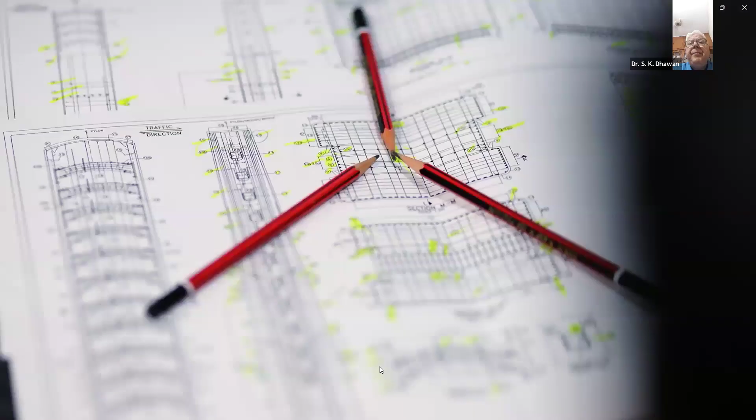IAStructE is registered under the Societies Registration Act 21 of 1860. It is a national apex body of structural engineers in India with a mission to promote the structural engineering profession and cater to the professional needs of the structural engineering fraternity.

In the short span of two decades, the association has attained an eminent position in the professional field. Its membership is valued very highly in the profession.

Since inception, IAStructE has been led by eminent structural engineers like late Shri Mahendra Raj, late Shri Shri Kumar Ghosh, late Shri Subhash Chand Mehrotra, Professor Mahesh Tandon, Shri Manoj Mittal, Professor R. Pradeep Kumar, and Shri Alok Bhowmick as its president.

IAStructE is a permanent member of the Engineering Council of India and interacts with the government on professional and policy matters related to civil and structural engineers.

To expand its reach, IAStructE has collaboration with various international professional like-minded associations and institutions like IStructE, UK and FIB for strengthening global connections and professional exchange.

IAStructE's prime objective is supporting and protecting the profession of structural engineering by upholding professional standards and acting as a mouthpiece for structural engineers in India.

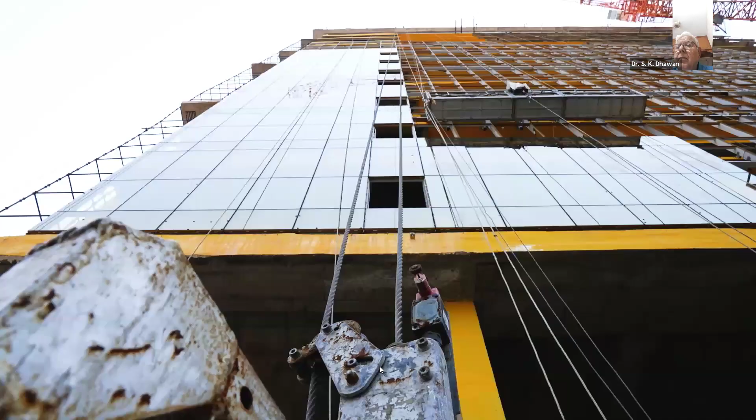IAStructE endeavors to ensure that its members develop the necessary skills in structural engineering and work to the highest standards by maintaining a commitment to professional ethics and standards.

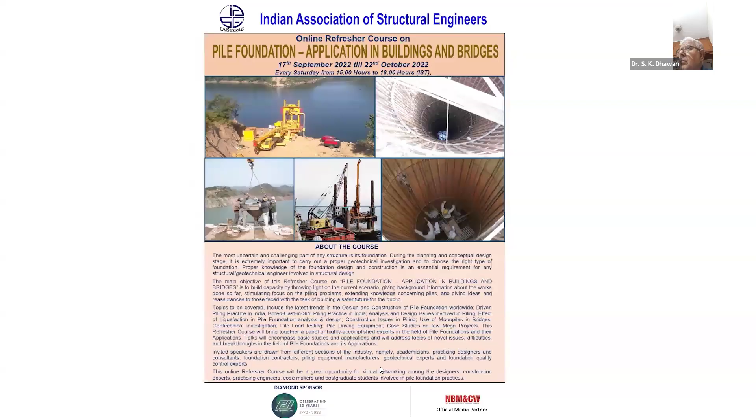IAStructE is actively engaged in organizing several continuing professional development (CPD) courses for structural engineers to help them update their knowledge and advance their career paths.

It also conducts refresher courses for young and practicing engineers and student-oriented programs. Seminars, workshops, conferences, technical lectures and discussions related to the latest technological advancements and case studies are also organized regularly for members to enable them to continuously update their knowledge and skill set by interacting with the best minds from the industry. IAStructE's activities are widely appreciated and known for quality technical content.

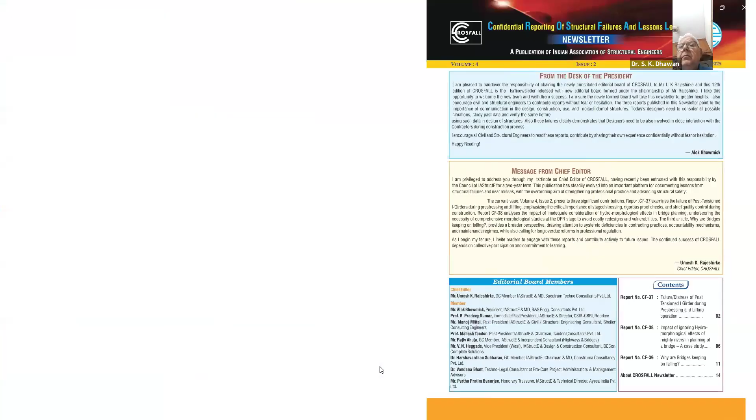IAStructE is also actively engaged in publishing its quarterly journal Structural Engineering Digest (SED), code commentaries, professional guidelines, monthly newsletter, and CROSFALL, a unique quarterly newsletter that confidentially reports structural failures and the lessons learned from them. IAStructE's publications are becoming popular with time.

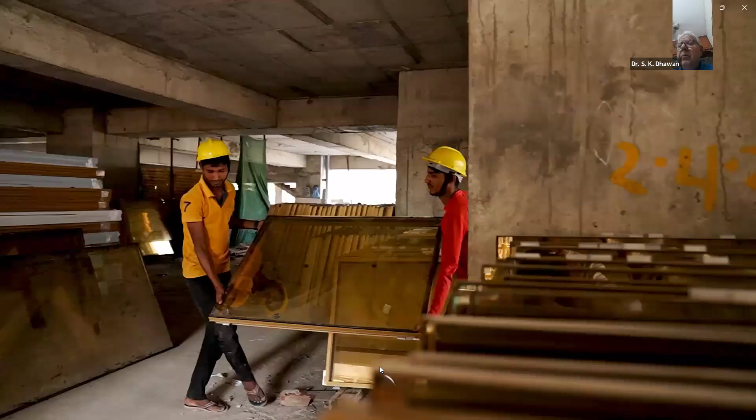IAStructE has representation in various technical committees of BIS and IRC as well. Its members are actively contributing to National Code of Formulations.

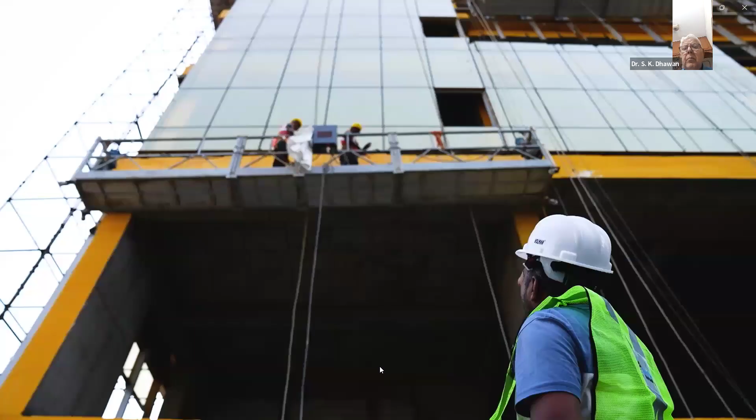In the year 2020, IAStructE started a National Awards competition to stimulate interest in the structural engineering field and to promote innovative thinking and creativity. The awards are presented to winners in recognition of their outstanding contribution to structural engineering in categories which include Outstanding Structure, Outstanding Structural Engineer, Outstanding Woman Structural Engineer, Promising Young Structural Engineer, and Best Master's Thesis in Structural Engineering.

Reaffirming its commitment to professional excellence, IAStructE launched the accreditation program in 2023. This flagship initiative empowers practicing engineers to evaluate their competencies, identify growth opportunities, and strengthen the foundation for sustained professional success.

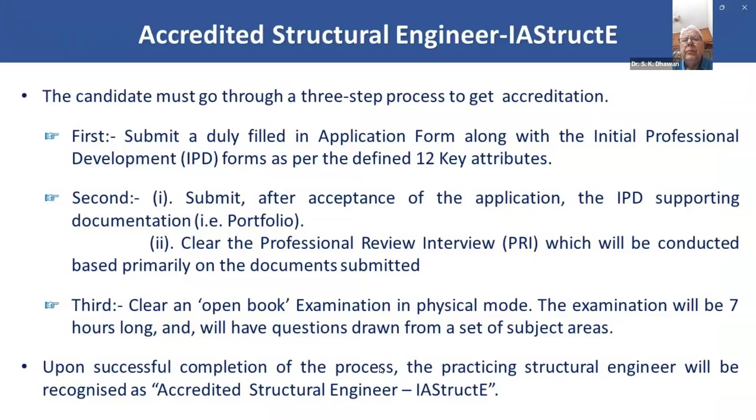IAStructE is currently operating from four regional centers, namely Eastern, Western, Northern, and Southern, having its headquarters in Delhi, to inculcate the professional culture and provide handholding to budding engineers.

Joining IAStructE offers exclusive resources, mentorship, and networking with industry leaders. Members enjoy discounted registration for workshops, seminars, and events, along with discounted membership of FIB, opportunities for certification, career guidance, leadership roles, and enhanced professional recognition.

IAStructE has its student chapters in several leading engineering institutions as well. Membership of IAStructE is open to all civil and structural engineers engaged in the structural engineering profession.

Members are elected based on their qualifications and experience in different grades as per eligibility requirements prescribed in the bylaws. Each application is carefully scrutinized before electing members.

More information about IAStructE is available on its website, www.iastructe.co.in.

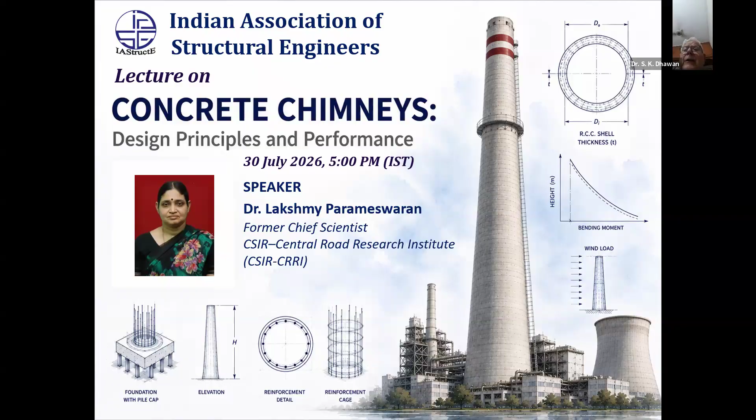This webinar will provide a comprehensive overview of the structural design, philosophy, and performance of tall concrete chimneys, with particular emphasis on provisions of IS 4998:2015 and guidelines in CICIND Model Code 2011, ACI 307-08, and relevant European procedures. Now I request Dr. Parameswaran to please continue the proceeding.

Thank you, Dr. Dhawan sir, for the nice introduction. And also I thank Vikas for preparing a nice background, it covers, I think, everything I want to speak. Thank you very much for that. Thank you.

I hope you can see my slide. Yes, yes, yes.

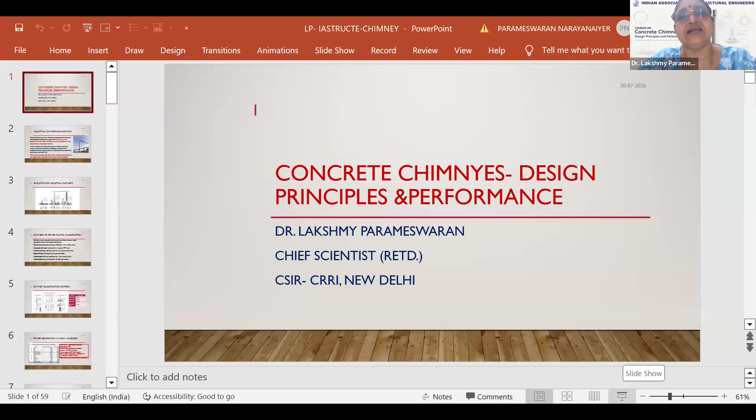A little background for this particular topic, because this is one area where I started my work in 1987. So when Dr. Dhawan asked me to give a talk, I thought why don't I go back and revise myself with what is happening in this area. So I prepared this talk on concrete chimneys, design principles and performance.

In fact, during the first 10 years of my career, I developed some software for the analysis, especially dynamic analysis, based on IS 4998:1992, for along-wind and crosswind analysis of chimneys, and also carried out internal testing of many thermal power plants of that time, like Panandro, Kutch, then Gandhinagar thermal power plant.

Wanakbori, Akrimota, and others. But when I was looking into whether they are still there or not, I found that some of these thermal power plants have retired. Then I thought that it is not only human beings who retire after attaining a certain age, but also these structures. Some of them started demolishing, but now I think they are thinking of extending the life of these chimneys by retrofitting methods.

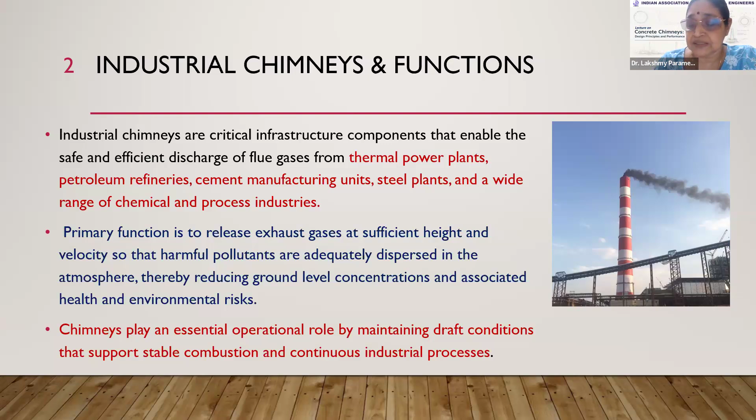When we talk about the evolution, the earlier stacks were of low height, basically for emission dispersion, and the material used for construction was steel. But steel stacks had certain problems: low height is one issue, wind-induced vibration another, then fatigue, and maintenance issues because of corrosion, etc. For the design of these stacks, emissions, wind and seismic forces were considered.

So then there was a transition to reinforced concrete. I remember the chimneys which I tested, they were probably 120 meters, 190 meters, like that. Many thermal power plants had unequal height chimneys, and they may be in a group, but because of limitation of funds, etc., probably first they would construct one and another after certain years, though the planning was done earlier.

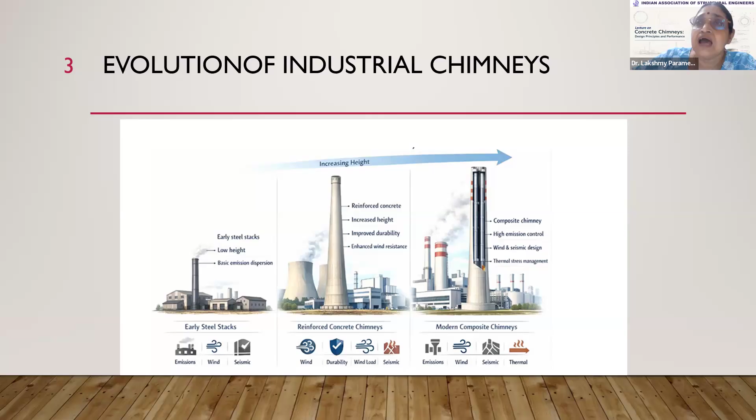These are excellent with respect to high emission control. There, thermal stress management is an additional thing one has to consider. If you see the CICIND model code for chimneys, they have come with concrete chimney with steel liner, FRP liner, etc. So there is advancement with respect to material and also with respect to height, which I will explain in my next slide.

They can be classified with respect to construction material and functional configuration. RCC concrete chimneys can be unlined or with liners. Composite chimneys are concrete shell with steel or FRP liners. Multi-flue chimney has an outer shell with 2 or 3 internal flues. Steel chimneys can be self-supporting or provided with guy wires at multiple levels so they are made stable with respect to wind forces.

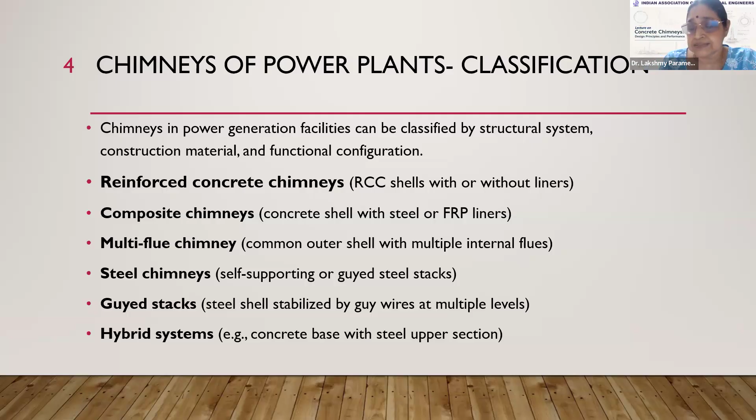Then the hybrid system, that is a concrete base with a steel upper section. So these are some classifications based on construction material, or whether it is self-supporting or guyed.

Again, the classification is reinforced concrete chimney, steel chimney, and lined or composite chimney. Height classification is basically short, medium, and tall. And why are tall chimneys required?

In the case of chimneys, apart from structural design considerations, environmental regulatory compliance is very important. In India, CPCB decides what should be the height of the chimney. They have fixed it as 275 meters for some thermal power plants. So short can be up to 60, 60 to 120 medium, and above that tall chimneys.

Generally they can be uniform, but to save material they are given a tapered profile. Power plant chimneys have high emission dispersion and multiple liners, while in process industry we have to think more about chemical resistance and thermal durability, because in some processing industries the flue gas temperature goes as high as 400 degrees.

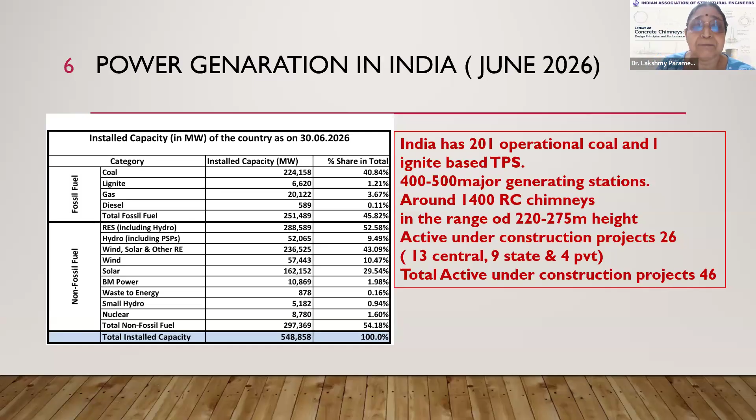At present there are centrally funded projects, some state funded projects, and even the private sector is making power plants. So 26 active construction projects are there, and some projects got delayed, so totally something like 46 construction projects are ongoing now. That means the topic is relevant.

The challenges, as I said, are environmental compliance, which is a major issue apart from structural safety, durability, and economic feasibility. The regulatory agencies like CPCB mandate the height, exit velocities, dispersion criteria, and the limit value of ground level pollutant concentrations, etc., which has to be met.

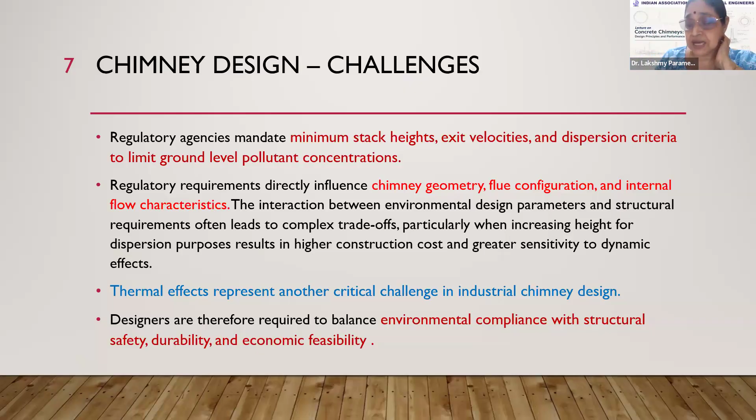The regulatory requirements influence what should be the chimney geometry, how many flues have to be there, how they have to be arranged, and the internal flow characteristics. So basically the interaction between the environmental design parameters and structural requirements often leads to complexity in the design. What will happen is the environmental compliance will require going to 275 or 300 meter height, which makes the structure more susceptible to dynamic wind effects. So with more height, the construction cost increases, and it becomes more sensitive to dynamic effects.

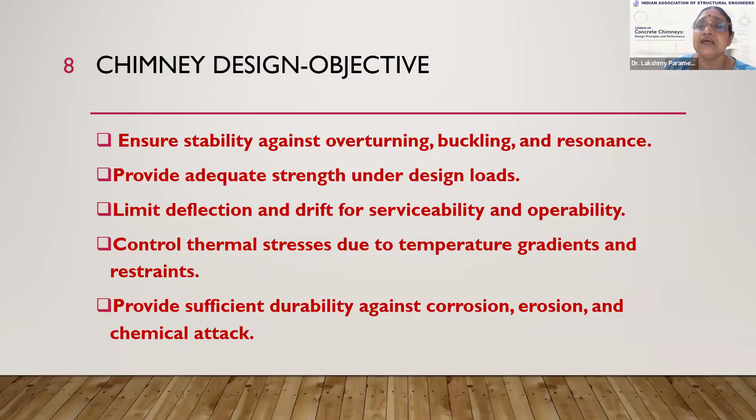So some challenges are there in this case. During design, being a tall structure, we first have to ensure it is stable against overturning, buckling, and resonance, because it's a dynamically sensitive structure. I will talk about resonance also. Then it should have adequate strength under design loads, and we must check the deflection limit or drift for serviceability and operability. Then thermal stresses are also very important - the thermal gradients, whether any restraints are there, and what stresses develop. As I said, durability consideration is very important, because corrosion, erosion, and chemical attack, some acid attack, can also be there. We have to consider all these aspects when doing chimney design.

When you talk about its behavior, basically it is a thin shell and a hollow cantilever, fixed at the base. And as I said, it has a tapered configuration, so the shell will have variable thickness along the height. Because of self-weight, it is subjected to axial compression. Then, as I said, the inner temperature is quite high and outside temperature is low, so there is a temperature gradient developing across the thickness.

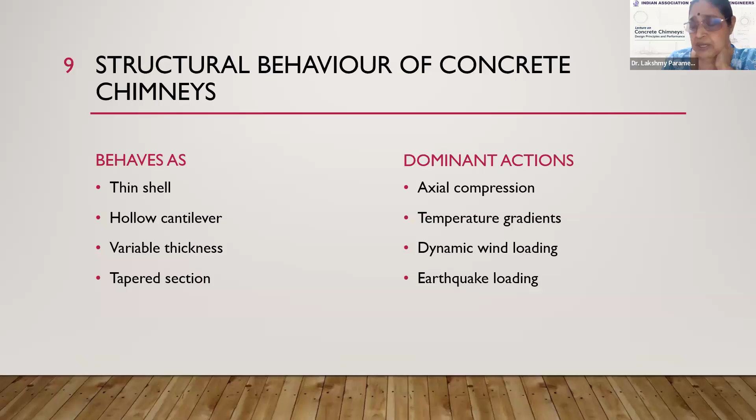Then the dynamic wind loading is very important - the along wind, across wind, and interference effect, if present, those things we have to consider. In some cases, depending upon the location, in most cases wind is going to govern, but still earthquake loading also has to be considered. So these are the dominant actions.

As I said, earlier it was IS 4998 1992, and it had two parts, one related to wind and another related to design criteria. But now the design and wind are combined into IS 4998 2015, but it still refers to IS 875 Part 1 for dead load, Part 2 for imposed load, Part 3 for wind load, and IS 1893 Part 4 for seismic action, and IS 456, the basic design code for design and detailing.

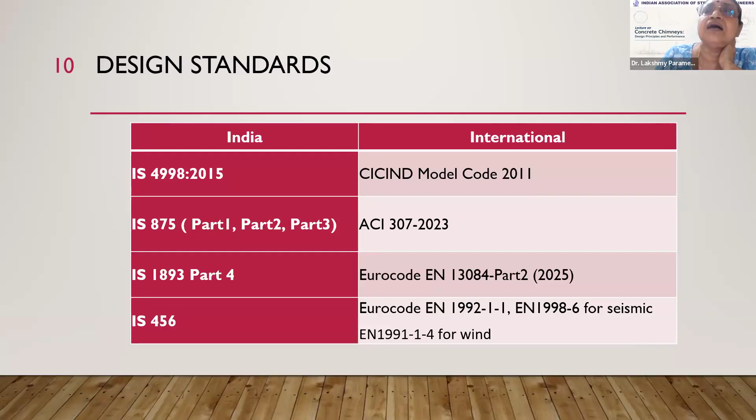Then Eurocode, the 2025 version, that is EN 13084, which again refers to some earlier Eurocodes, that is EN 1998 Part 6 for seismic action and EN 1991-1-4 for wind action, like that. So there are various international standards, because even if in some countries some of these codes are popular, still I think people in our country with IS 4998 can also have a check with CICIND Model Code. That sort of principle can be followed also.

So with respect to IS 4998, basically that is for circular industrial chimneys. You can have chimneys of other cross sections also, but if you go for other cross sections, then wind tunnel testing will have to be done. So this is only applicable for circular industrial chimneys. And here the load assessment and structural design requirements are combined, whereas as I said, in 1992 they were in different parts.

Then the ultimate limit state - basically stability, flexure, compression, combined axial and bending, then foundation failure, etc. we have to check. And serviceability checks are there with respect to crack width, deflection, durability, and vibration. Basically, these are the various aspects to be seen.

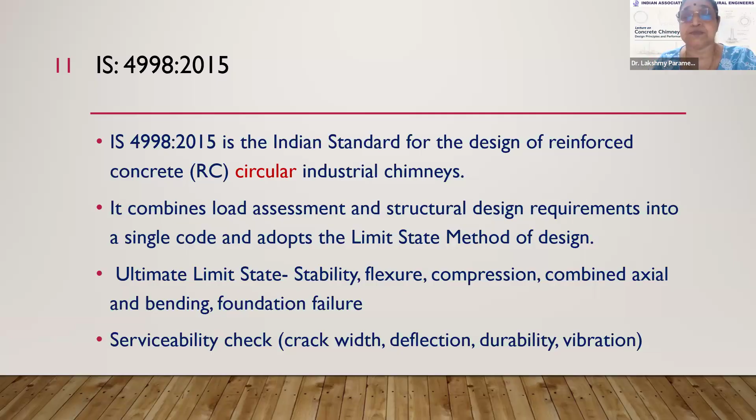So the design step starts with selection of height and diameter, then determination of dead, imposed, wind, earthquake, and thermal loads. Then, as I said, we have to perform the dynamic analysis, free vibration analysis required, to perform along wind analysis.

Calculate the axial forces, bending moment, and stresses. Design shell thickness and reinforcement - again, you have the vertical reinforcement and also the hoop reinforcement. Then check serviceability and ultimate limit states, whether the criteria are met with, and design of foundation.

Foundation, again, we can have either a raft, a pile, or a combined pile raft foundation, and then the reinforcement detailing and construction drawing preparation.

So the input parameters basically required, apart from the geometrical parameters, because that is governed by the environmental compliance, the flue gas temperature, gas flow rate, internal pressure, corrosion, that exposure class, then which type of lining and how the lining is held, whether it is freestanding or attached.

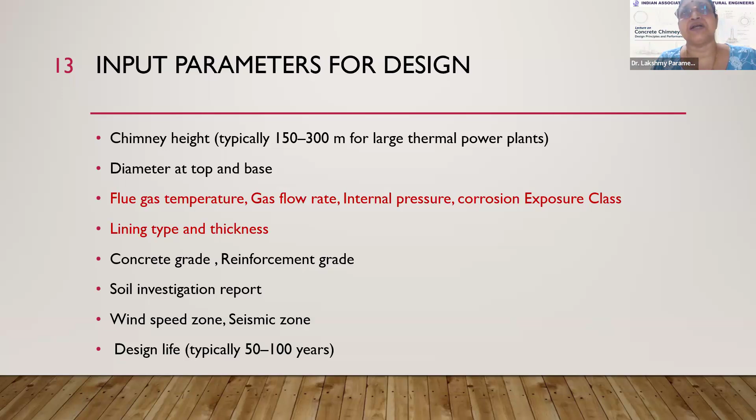What is the thickness of that liner, etc. Then the concrete grade, the reinforcement grade, and definitely the soil investigation report and zone in which it is there, the wind speed zone and the earthquake zone. And design life, like 50 to 100 years, but I see that many of them have retired early, so I think 50 years is generally what is considered now.

So with respect to the thermal and operational parameters, as I said, the flue gas temperature is very important, because in some cases it is 120 degrees and in some process cases it is 400 degrees centigrade, because that thermal gradient will depend on the difference between the temperature inside and outside. So that will give the thermal gradient, from where you can work out the induced thermal stress.

And if it is not appropriately considered, then there can be some cracking happening. Then the flue gas composition - basically you can have sulfur dioxide, nitrogen oxide, chlorides. Along with that, if moisture is there, it creates an aggressive environment, and it accelerates the corrosion and chemical attack. And because of the presence of moisture, condensation happens at low temperature, which is detrimental

for the liner degradation, and you may also require some early maintenance. So that is why the chemical composition of the flue gas is also very important, and it controls the corrosion rate, and also the acid attack is what we have to be worried about.

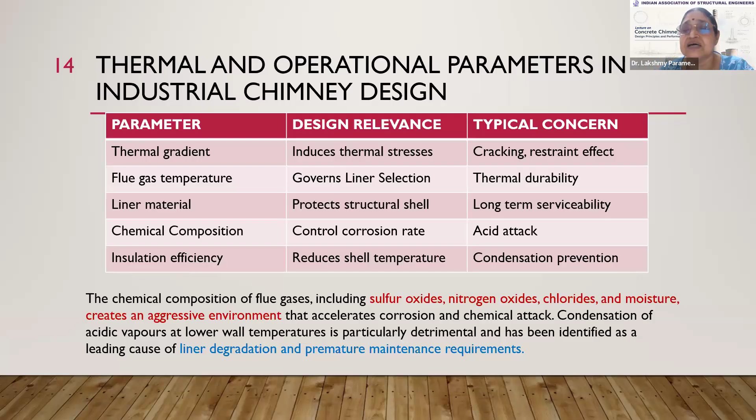And the insulation efficiency, because that will reduce the shell temperature and also prevent condensation. And as far as environmental and dispersion design parameters, basically they are the stack height, because that will control the dilution distance, which helps reduce ground level pollution concentration. And what is the exit velocity, because that will govern the plume rise and also prevent downwash.

Stack diameter and the emission rate will affect the concentration level. And definitely we have to meet, apart from structural considerations, the regulatory limits, because we need to protect public health. So the environmental compliance in India with CPCB is very important. So these are the dispersion design parameters.

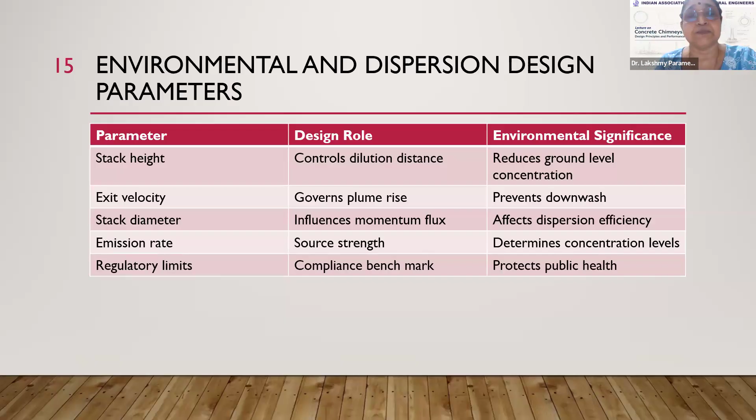I'm not going into detail, but I think we need material parameters like thermal conductivity of concrete, then coefficient of thermal expansion, flue gas temperature, ambient temperature, liner thickness, liner conductivity, insulation thickness, conductivity, and whether there is an air gap between these two - and what is the thickness of that.

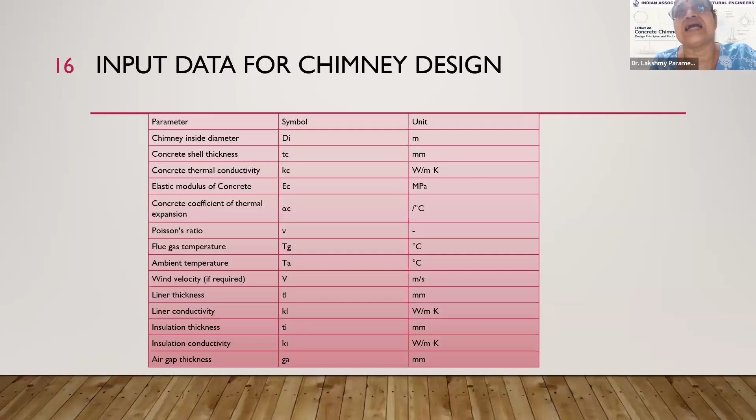So what is the thickness of that? So all these things are required, because with the thermal analysis, a proper heat transfer analysis can also be done. So we need many of these as the input parameters.

So the chimney must be designed for the dead load, basically the self-weight, liner, platforms - the density you can get from IS 875 Part 1. Imposed load can come from IS 875 Part 2. Then wind load IS 875 Part 3 and IS 4998-2015. Earthquake load, as I said, IS 1893 Part 4. Then temperature effects and construction load where applicable.

So it is basically the buffeting force we have to work out, which we call the along wind force, which has two components: one because of the turbulence present in the approaching wind, and a resonant component.

Then there could be a vortex-induced vibration, that is oscillation in the perpendicular direction, which causes fluctuating lift and gives rise to a crosswind force. So we have the RCC shell liner, the thermal effects, and with respect to seismic, it is mass into acceleration - the seismic inertia also has to be considered. So these are the loads to be considered for the design.

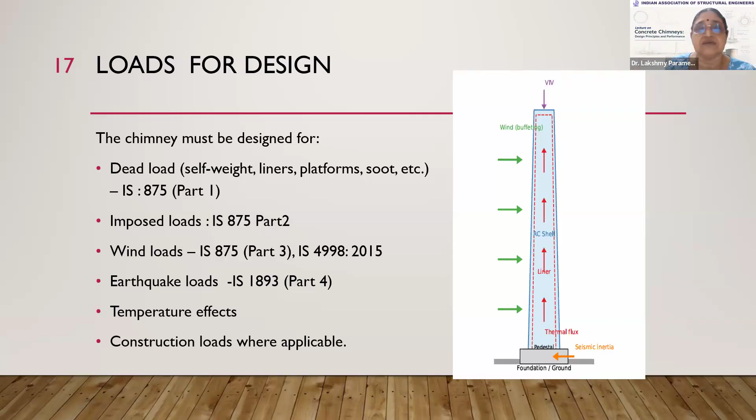With respect to the imposed load, this has to be considered basically for the individual structural element design. For example, there are a number of platforms provided, and there may be some ladders also. So for the design of platforms, ladders, etc., and if some local strengthening is required, there you consider this imposed load.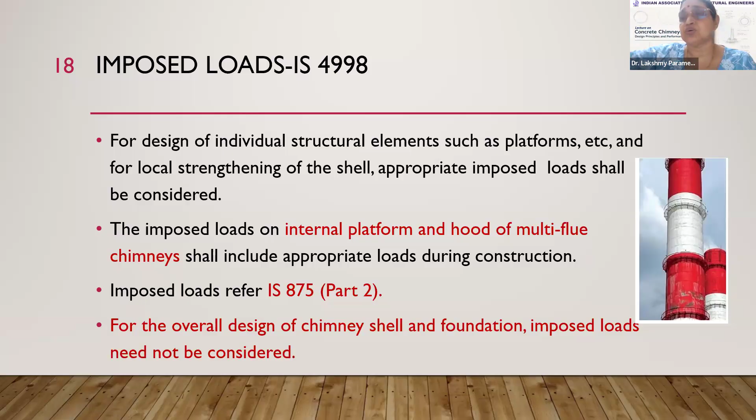Imposed loads on internal platforms and hood of multi-flue chimneys shall include appropriate load during construction, because during construction some people will be standing with some equipment, etc. But for overall design of chimney shell and foundation, we need not consider the imposed load. It is only for the local design and also for the design of these platforms, because these platforms are at different heights, so it has to be appropriately considered.

Then the wind load - wind is a random force, and that governs the tall chimney design. So we have the along wind effect, that is the dynamic gust response method, that is the gust response factor or gust factor method, which can be used to work out the along wind forces.

And as I said earlier, across wind, that is the vortex excitation - it is due to the vortex excitation. Then when chimneys are present in a group, there will be a wind-induced interference effect on the downstream chimney because of the presence of the upstream one. Then along wind and across wind moments are to be combined for the design.

And apart from that, there is a circumferential wind pressure on the shell. I will explain that.

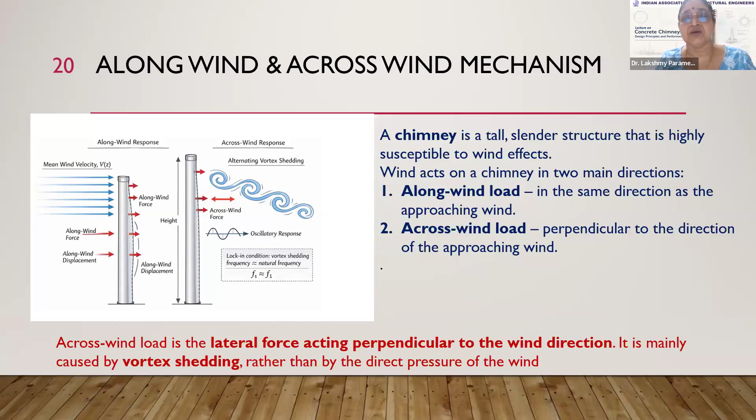So I want to tell you that for this chimney, the bending shear, bending moment, etc., because of these forces will be there. And also it can vibrate in different modes, because these modes are also important, so dynamic analysis is required.

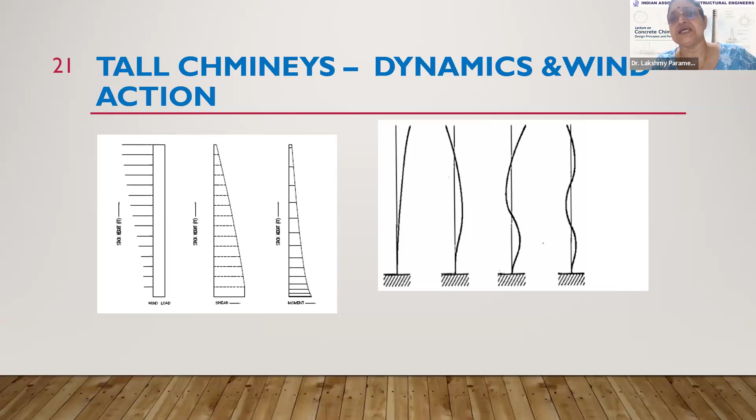In fact, IS 4998 gives, for unlined chimneys, for preliminary calculation, some empirical equations for first and second mode, but for other types of chimneys you need proper FEM analysis, etc. So you can see, because it's a cantilever structure, these are the modes, and they are also important.

And determination of design wind speed - I think you all know it is obtained based on where the chimney is located, the basic wind speed, and K1, K2, K3, K4 factors. But here we have to consider the hourly mean wind speed for the design, because we are using the gust factor approach, and the 50-year return period is considered.

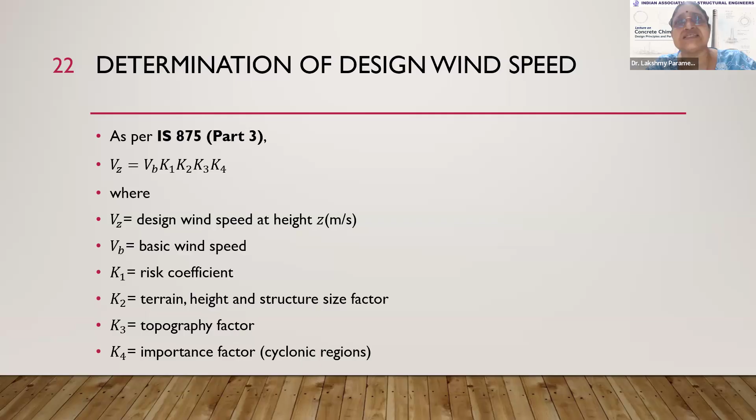Then the terrain category is considered as 2, so the topography factor, and if it is a cyclonic region, then the importance factor also has to be considered. The design wind pressure, you know how to compute, that is PZ equals 0.6 VZ square. Then the along wind force, as I said, has 2 components.

One is the mean and one is the fluctuating component. The fluctuating component is because of the gust effect. You can see that F bar Z, the gust fluctuating component, depends on the gust response factor. How to compute the gust response factor, I'm sure you are familiar with, because this is what is given in IS 875 part 3.

Here the only important thing is that the structural damping you have to take for the along wind load is 0.016. When you talk about the gust response factor, there are 2 terms inside the square root symbol, that is B plus SE by beta.

Basically, B is the background factor, that is because of the turbulence present in the wind, and SE by beta, E is the energy content available in the spectrum, and resonance happens when the frequency of that turbulence matches the structural frequency. So that's why you have to work out this SE by beta, and beta is the structural damping, because that damping has an effect on this.

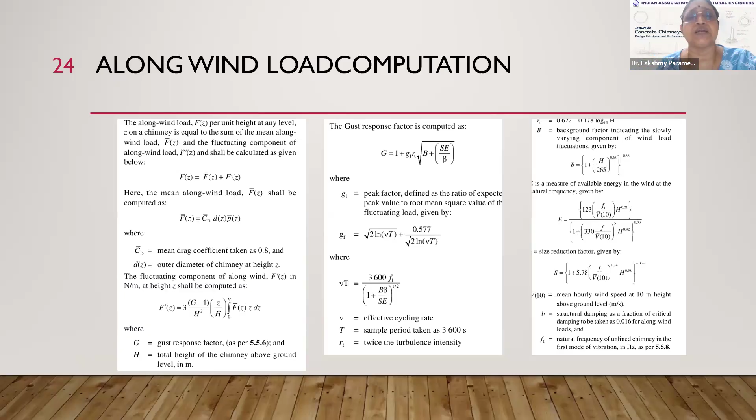And the CD value, because this is the along wind force, you know what has to be the CD value for a circular section, like 0.8 is what is given in IS 4998, and generally this is the value used in many codes.

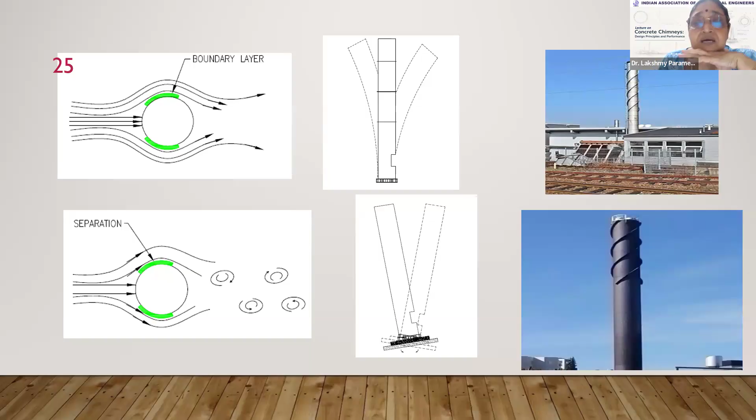So you can see that these vortices are shed, and the locked-in region means it is not happening at all wind speeds, but only at certain wind speeds where the shedding frequency coincides with the structural frequency. That is why it is called the locked-in region.

Only at that particular region this vortex shedding is happening, and what the critical wind speed at which this vortex shedding is going to happen, that we can work out using this Strouhal number. Strouhal number is generally 0.2 for the circular structure. So the critical wind speed can be worked out if you know the frequency of the structure and the diameter of the chimney.

So IS 4998 also gives a way to work out the critical wind speed and check whether that is below the design wind speed. That means the vortex shedding is likely to happen, and in that case you have to consider the across wind forces.

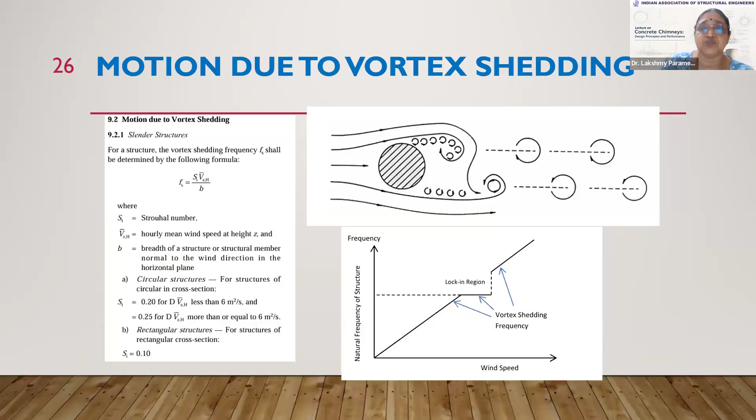So why the across wind load is important is that if it is not accounted for, it can cause a lateral deflection, as I have shown you. And because this happens at a low wind speed, the vortex induced oscillation is a limited amplitude oscillation, but it can still cause fatigue, especially fatigue damage of steel chimneys.

And even the fatigue for concrete is there. In fact, CICIND code considers the fatigue effect also. Then it can lead to some cracking in reinforced concrete chimneys, and in some cases structural instability and failure, because in some cases the crosswind forces are much higher than the along wind forces. So we cannot ignore the crosswind forces.

Then the basis, as I said, is that it is because of the vortex shedding. Vortices are shed alternatively from each side of the chimney, and alternative forces create the fluctuating pressure.

Basically, it is the fluctuating lift force that we have to consider when we work out the crosswind forces. So the lateral oscillation can be large, and resonance can happen when the vortex shedding frequency matches with the structural frequency, causing large oscillation at a particular wind speed. That is the lock-in phenomena.

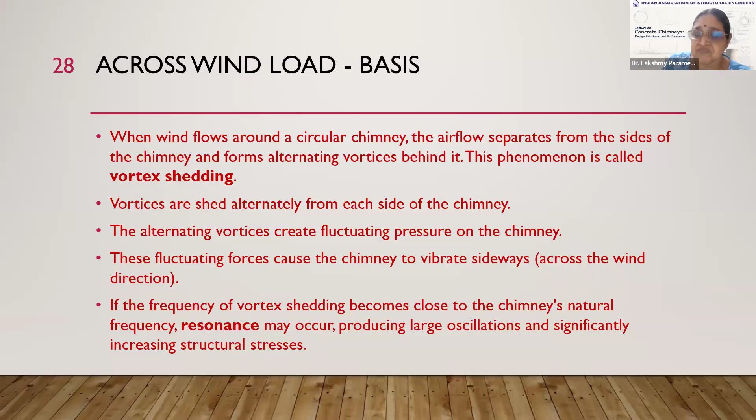The factors affecting crosswind forces are: higher wind speed generally increases the crosswind response; chimney height, since taller chimneys are more flexible, and that's why strakes are provided at the top, maybe at 1/4 or 2/3, 1/3 height of the chimney; the diameter of the chimney; natural frequency; and structural damping is very important. If you have higher damping, the amplitude of oscillation will get reduced. Terrain and the presence of turbulence are also important.

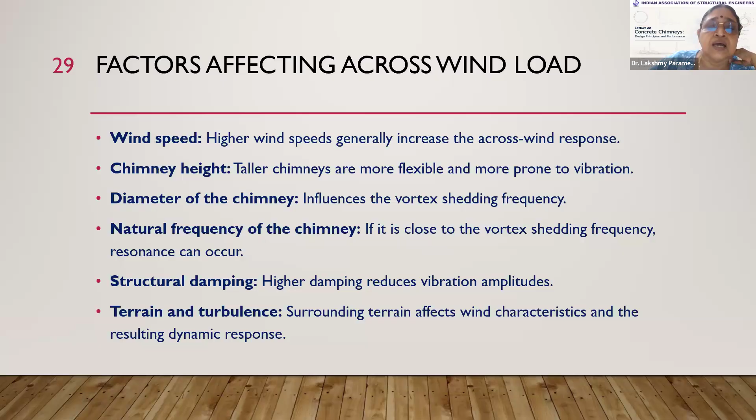This is what I said, that for preliminary design, an empirical formula has been given. You only need to know the thickness of the shell at the bottom, the thickness at the top, the central line diameter of the shell at the bottom, the density of concrete, and the dynamic modulus of concrete. So from M25 to M50 grade concrete, the dynamic modulus values have been given.

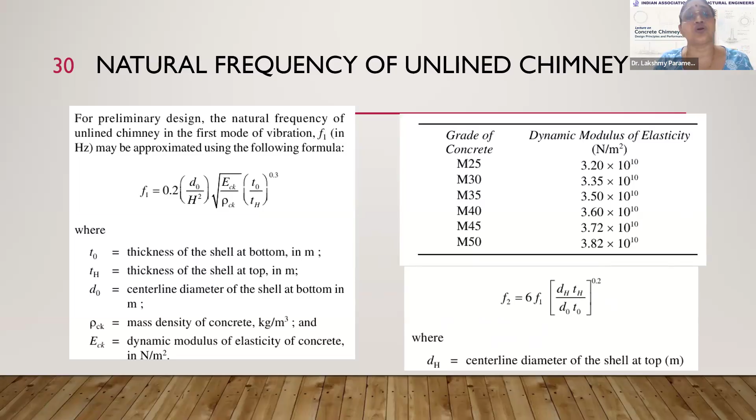Also, how to compute the second mode frequency is also given, but these are applicable only for unlined chimneys. That's why you need a proper free vibration analysis to find out the frequency of vibration in various modes. Then, as I said earlier, the critical wind speed at which vortex shedding matches with the chimney's natural frequency, that is VCR, we have to find out, which is FD by ST.

In IS 4998, it says that if the VCR is between 0.5 VZ reference and 1.3 VZ reference, then for both the first and second modes, we have to work out the crosswind loads. We cannot ignore it. Outside that range, we need not consider the crosswind load.

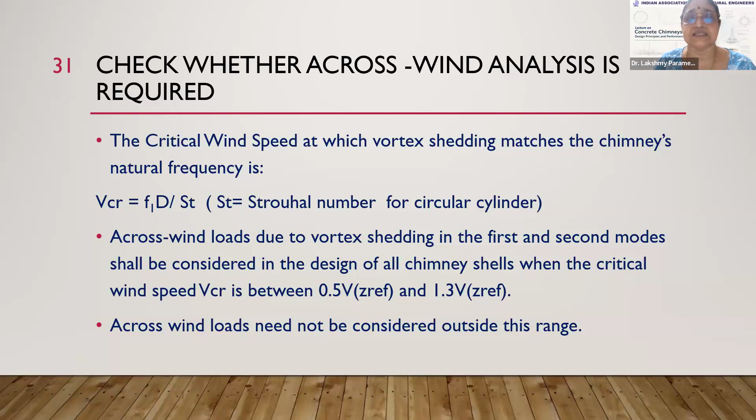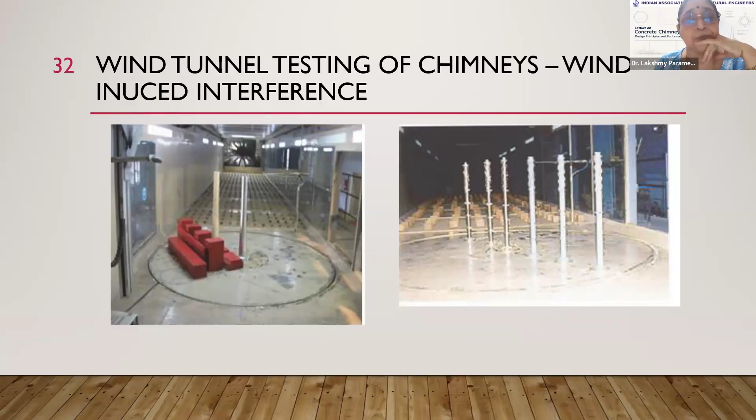At the base, there will be some strain gauges pasted, so that you can work out the bending moment because of the wind, both along wind and across wind, etc. You can obtain this from the instrumentation.

So regarding wind-induced interference, as I said, the lift force, that is the across wind force, has to be modified. Depending upon the distance, the value to be taken, a multiplying factor has been given.

For chimneys that are not identical, because in some power plants there is one tall chimney and one short chimney constructed earlier, if the spacing by diameter is less than 3, then you may require a boundary layer wind tunnel on models, or if wind tunnel tests are already done for a similar arrangement, you may refer to that.

Basically, the change in the lift force because of the presence of the other chimney has to be considered. But except for the wind tunnel testing specification, it has not been given whether it need not be considered. Because even in the power plant, sometimes there is restriction of land availability, due to which you have to keep them close, and also some pipe connections, etc. have to be done. So you cannot space it that far to minimize the interference effect.

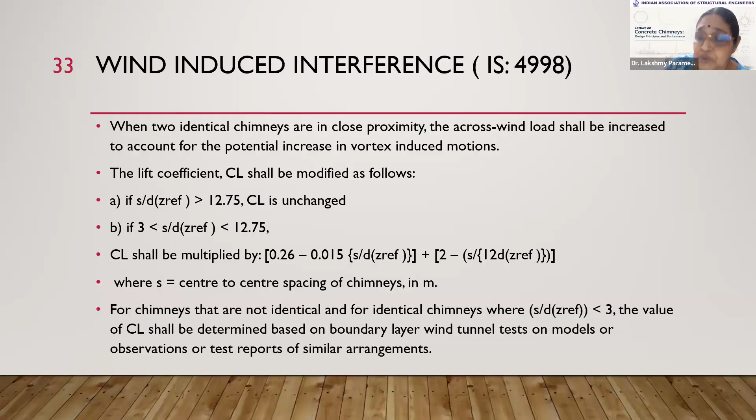Because of other considerations, you may have to keep it very close. But you have to consider the across wind force, you cannot ignore it. Then the circumferential moment due to wind is also important, because of what happens when the circular section wind is moving around that.

That gives rise to a non-uniform pressure distribution around the circular body, which is dependent on the Reynolds number. That non-uniform wind pressure can create unequal pressure distribution on the circular circumference of the shell, and because of that the section can slightly deform also.

So some circumferential bending moments and hoop stresses are developed. In fact, ovaling is one important phenomenon to be considered for a cooling tower, because when you are doing a dynamic analysis, even the ovaling mode has to be seen. That is, circumferential modes. Apart from the vertical mode, the circumferential modes are very important in the case of a cooling tower.

But again, the circumferential bending moments are to be considered because they can give rise to some local stresses. So the stresses are significant in concrete chimneys and steel chimneys when the shell is thin, and structural safety is compromised if the circumferential wind effects are not considered.

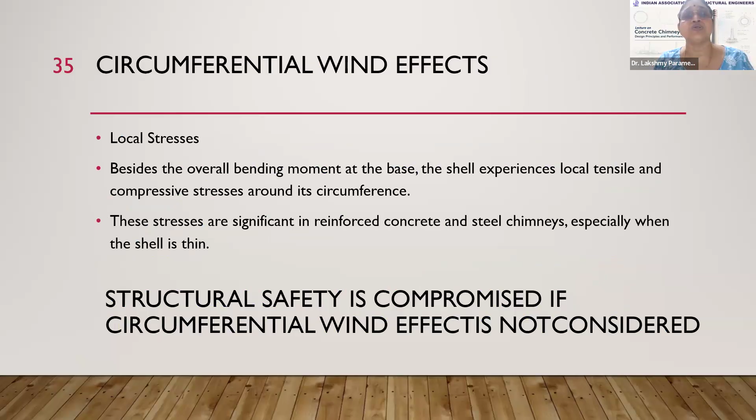So there is a method by which you can work out the circumferential wind forces. Here you have to see that this PZ, which is used in the calculation of circumferential ring moment, is the design wind pressure due to 3-second gust and not the hourly mean wind speed.

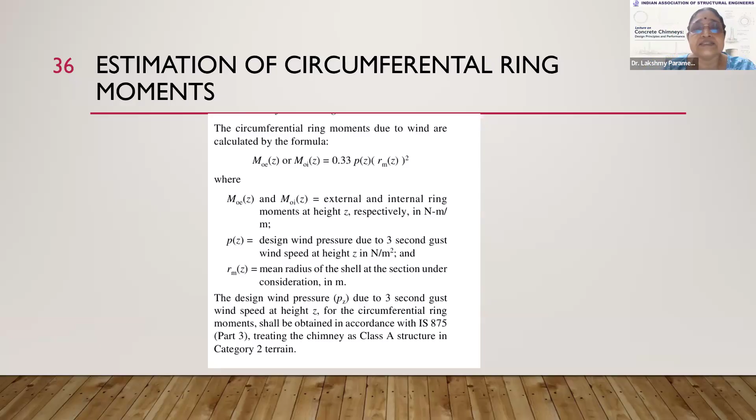Hourly mean wind speed is used for the along wind force because you are using the gust factor approach. Depending upon the duration of wind, like 3-second or hourly wind speed, the value is also changing. So in this case, you have to consider the 3-second gust for the calculation of circumferential ring forces.

Then the earthquake forces - basically tall chimneys are long period structures because they have frequency lower than 1, with low seismic mass participation. And IS 1893 part 4 is what this IS 4998 refers to. But here they have given a response reduction factor of 2 and an importance factor of 1.75 for the earthquake.

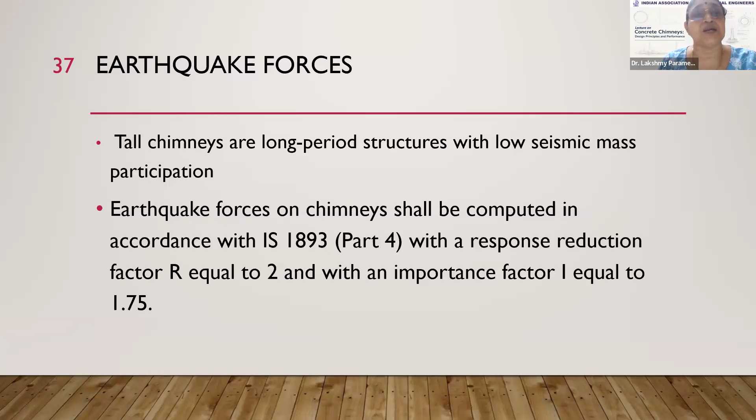And these are general methods which you can use, like the equivalent static method, which is a simple and force-based approach for short chimneys, and the response spectrum method, where you consider multiple modes and modal superposition, and the dynamic effects can be considered.

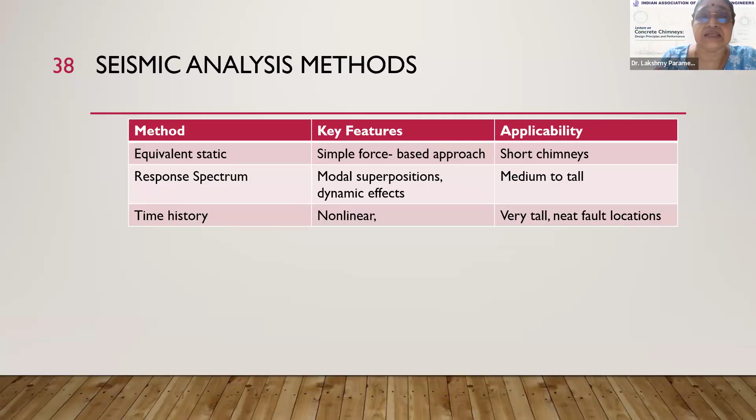And if you have a very tall chimney which is close to the near fault region, there you can go for a time history analysis. So that sort of analysis one can go for.

Then this is about the temperature distribution, which is very important. Here the important aspect is what stress is developed because of the thermal distribution. So sigma T, the thermal stress, is E, the elastic modulus of the material, times the coefficient of thermal expansion, times delta T, the difference between the inner and outer temperature.

But you have to understand that this particular relation is valid for a fully restrained homogeneous material subjected to a uniform temperature change, and it assumes that the thermal expansion is completely prevented and no stress redistribution occurs within the section. This is the assumption on which we are working, and this is the method even ACI and others have specified, but they say if you want, you can go for a heat transfer analysis also.

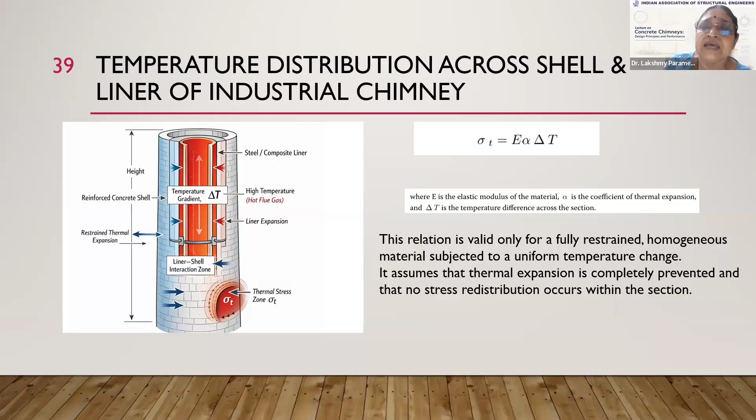So when we talk about thermal loads, basically chimneys operate with hot flue gases, so high internal gas temperature is there relative to the ambient temperature. So a radial temperature gradient through the wall thickness generates non-uniform vertical and circumferential temperature distributions.

So we have to consider during the structural analysis: the uniform temperature rise causing global expansion and axial thermal strain; the thermal gradient between the hot inner face and the cooler outer face, which induces bending; restraint force at the base and supports if thermal expansion is prevented; and transient thermal loads, which may happen during startup, shutdown, or emergency trips. So all these four cases are to be seen.

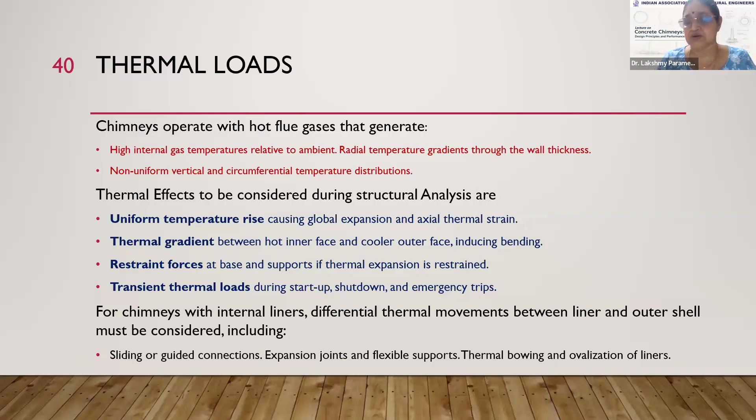And for chimneys with liner, differential thermal movement between the liner and outer shell also has to be considered. So I'm just giving a glimpse of what is given in ACI code.

This is for the thermal design of the concrete chimney that is carried out, first determining the temperature distribution through the chimney wall and then calculating the stress. So it has given appendices, that is appendix C for thermal temperature gradient and appendix D for the stresses.

And basically the operating temperatures, they are to be established. As we discussed earlier, what are the input parameters? The flue gas temperature, ambient air temperature, maximum and minimum operating conditions, and if there are some startup or shutdown conditions, those things are to be seen.

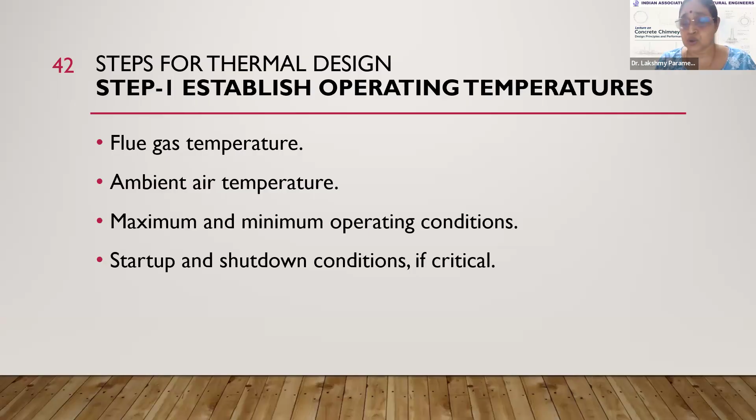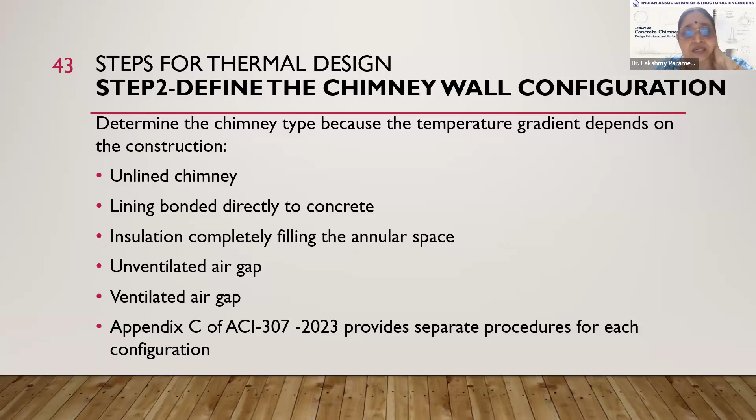Then we have to see what the thermal temperature gradient is, that will depend on how we are constructing the chimney, whether the chimney is unlined or lining is bonded with the concrete, or insulation completely filling the annular space, or unventilated air gap or ventilated air gap. So for all these conditions, basically ACI 307 provides separate procedure. So these things are covered here. That's why I try to give a glimpse of this particular one.

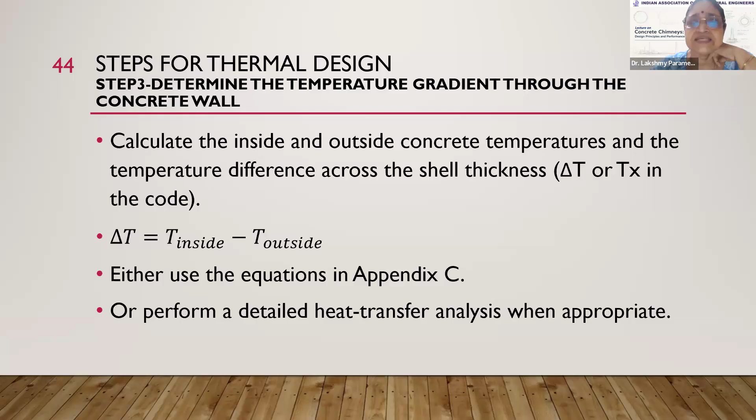And the delta T, which we have to calculate, that is inside to outside. And also you have some equations given in appendix C, depending upon the type of the liner or insulation, etc. Or they say that a detailed heat transfer analysis can also be performed. Then step 4 is to calculate thermal stresses.

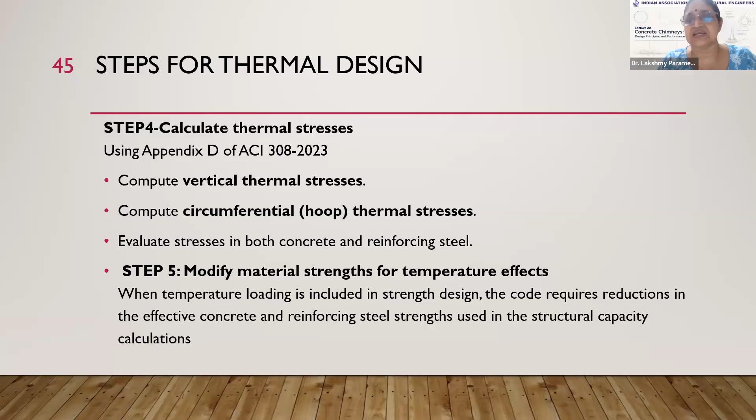Again, appendix D gives vertical thermal stresses. And as I said, the circumferential thermal stresses are also important. And you have to evaluate what is the stress in concrete and reinforcing steel also. And in this case you have to modify the material strength, so the strength reduction factor is also given while considering the thermal effect.

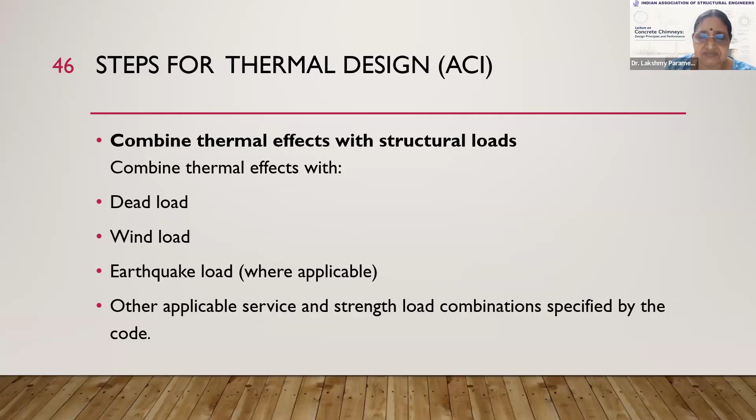So combine the thermal effect with structural loads. Basically we have to do dead load plus thermal, dead load plus wind plus thermal, earthquake with thermal, like that. And then you do the serviceability check as well as the strength check that has to be done.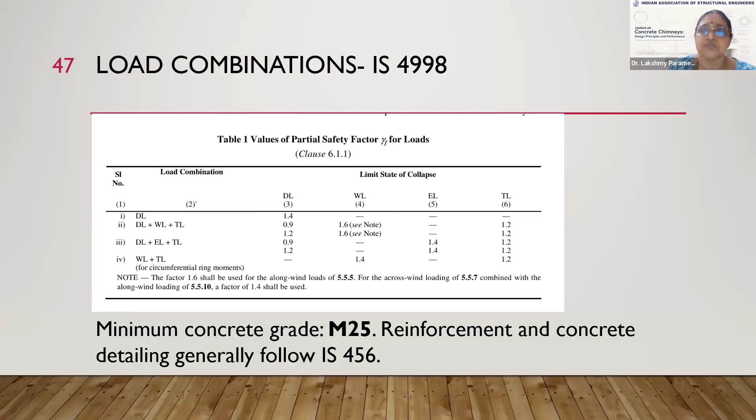And as I said, M25 to M50 is the grade of concrete which they have specified, but minimum is M25, and reinforcement and concrete detailing, basically IS 456 is to be followed. And if you see even the ACI code, the longitudinal reinforcement, circumferential, then a combined axial force and bending moment to be considered, cracking requirement to be checked, minimum reinforcement provisions, those things are given in ACI also.

And as I said, the liner design is very critical for the performance of the chimney. You can have either single flue chimney or multiple flue chimney, and there could be metallic liner or refractory liner, and even the liner may be independent or it may be a supported liner system. So there can be a lot of options available.

Independent liners are preferred for tall chimneys because they reduce the stress transfer to the outer shell, whereas supported liners may introduce additional interaction effects. Then the thermal expansion difference between the liner and shell requires careful detailing through expansion joints or slip connections to prevent stress accumulation and structural damage.

Actually, if the liner design is not appropriately done, then that can cause cracking, support failure, and also long-term deterioration. So liner design is also very important. The liner design selection, that is what material to be used for liner, and the detailing has to be integrated with thermal, structural, and operational consideration to ensure reliable performance.

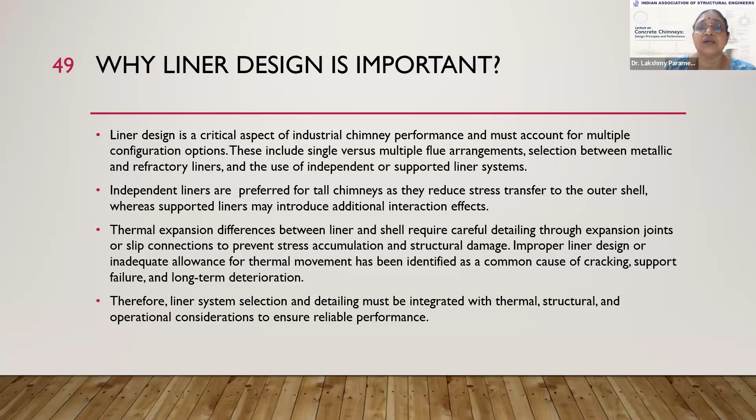So the serviceability check, I'm just giving what is given in IS 4998, the top lateral deflection, they said H by 500. Crack control, they are following IS 456, so depending upon the environment, 0.3 or 0.2 or 0.1, like that.

Stress check for steel and concrete within specified limits, and foundation performance - basically it should not have settlement, etc. These checks help ensure the chimney remains functional, durable, and stable during its service life under normal operating conditions.

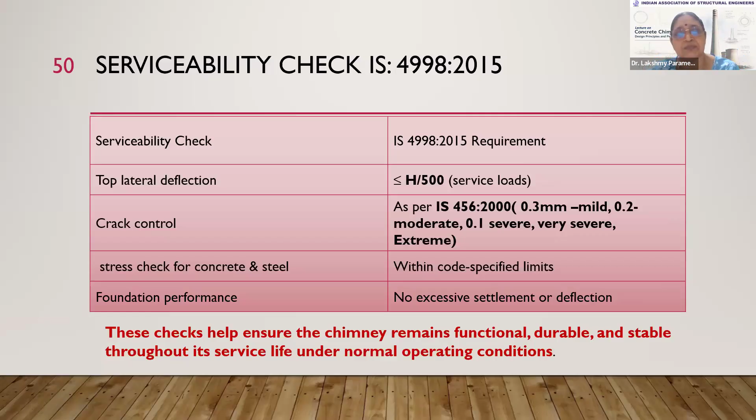When we talk about performance, I've seen in some papers from Poland that after 1 year the chimney develops cracks. You can see vertical cracks, and they say it's a normal crack because it's not very wide, but there are certain cracks which are very wide - they are called separating cracks.

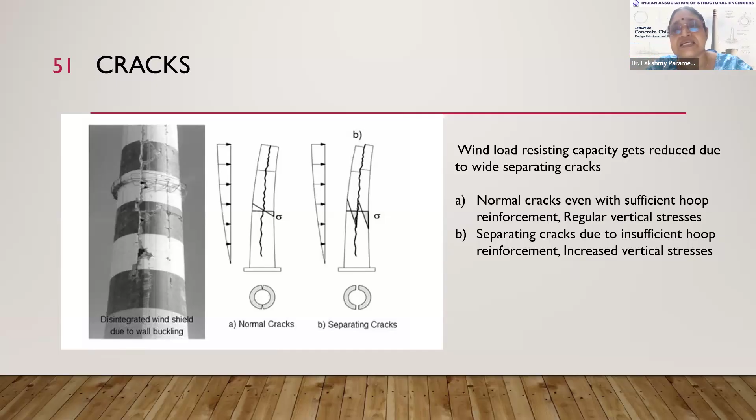Basically, where the hoop reinforcement or circumferential reinforcement is insufficient, separating cracks happen in the outer shell. There could also be some buckling that leads to this sort of wide crack, and the wind load resisting capacity gets reduced if wide cracks are happening.

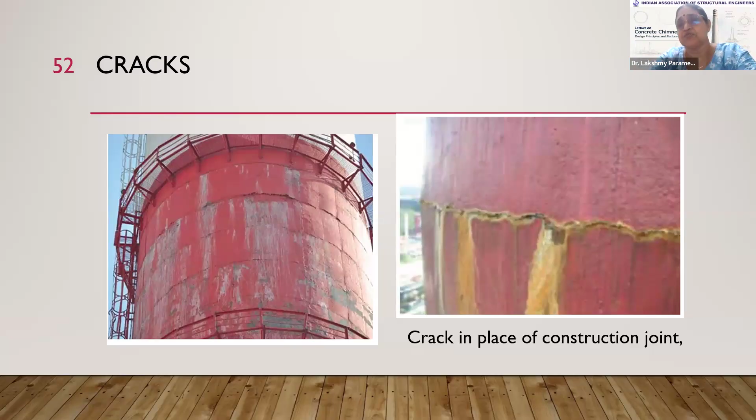You can see some spalling, cracking, etc. happening, because either you have slip form construction or jump form construction, and if the construction joints are not properly designed and detailed, you can see cracks happening at the location of the construction joint, with condensed material oozing out of that particular joint.

So you can have cracks because of usage of poor quality material, or poor quality control, or cracks caused by temperature if it's not properly assessed. Even the liner design and liner material are also important.

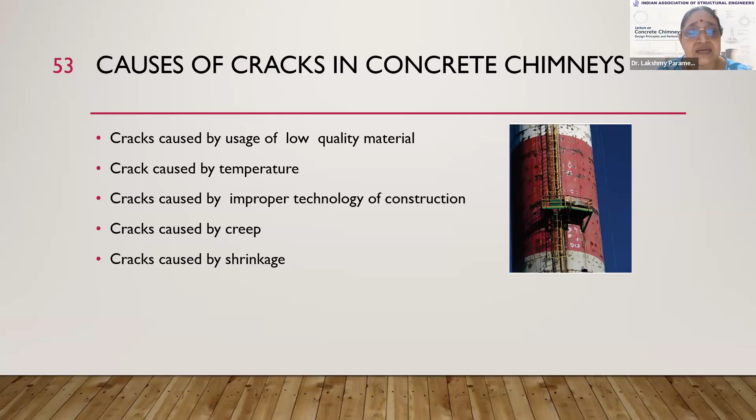Cracks caused by improper technology of construction - slip form is continuous movement, jump form is different, and the construction tolerances specified in IS 4998 also need to be checked, because with that, some cracks can develop, and then there's creep, shrinkage, etc.

Corrosion is important in fertilizer plants or chimneys located in the coastal region. Lining failure I've explained because of heat transfer or concrete degradation.

Corrosion of steel embedded in concrete - the remedies can be using a higher grade concrete with lower permeability, since concrete has interconnected pores. So a low permeability mix, adequate cover, protective coating, and periodic inspection.

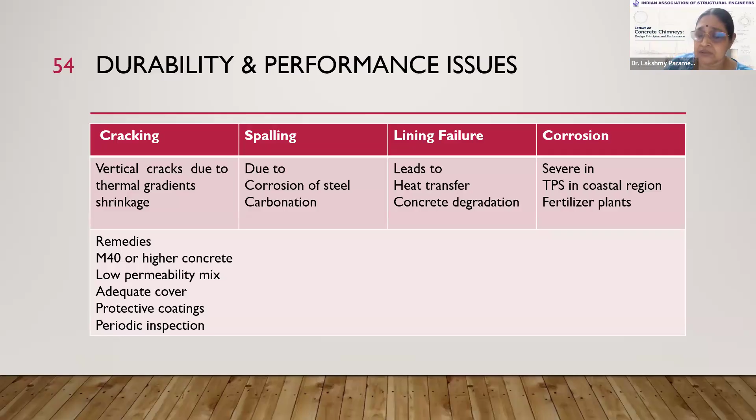In fact, because of the height, access to the chimney is an issue for doing inspection. But now with modern technology available, these can be used for inspection.

Then the foundation design - basically you can have either raft or pile raft foundation. Again, that should resist vertical load, overturning moment, and lateral loads while limiting the differential settlement. That is very important - the differential settlement should not happen, and the tilt also needs to be checked.

If you see a comparison of what's given in ACI, Eurocode, and CICIND regarding wind - they have a quasi-static approach and some checks, and as I said earlier, EN refers to EN 1991-1-4. CICIND also follows mean plus gust equivalent, like what we are doing.

Then crosswind - basically called vortex induced vibration - has to be project specific because it depends on the frequency and diameter of the chimney, etc. Eurocode has given some empirical option, we have also given an empirical option, and CICIND considers the negative aerodynamic damping and also the bandwidth, etc.

Then seismic elastic spectrum method for ACI, and EN 1998 - I said part 6 is to be referred. Then CICIND gives limit state plus ductility requirement. Then thermal - some basic guidance is given in ACI.

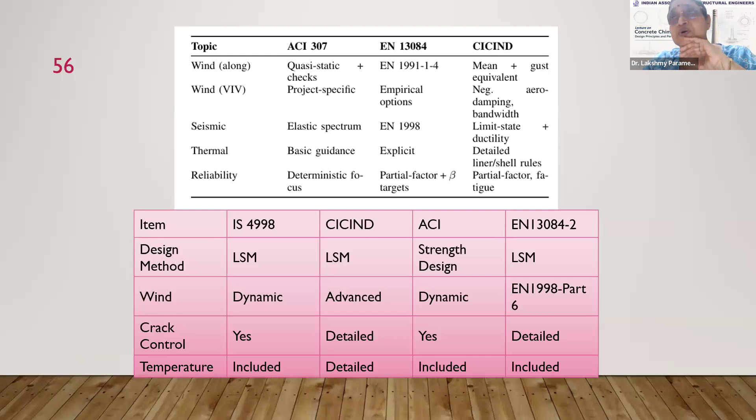I've explained that. ACI also just gives guidance, and CICIND has detailed liner and shell rules, because depending upon the liner - whether FRP or steel - along with the concrete shell, they've given everything separately. ACI has a deterministic approach, but the reliability targets are given in Eurocode, along with partial safety factors.

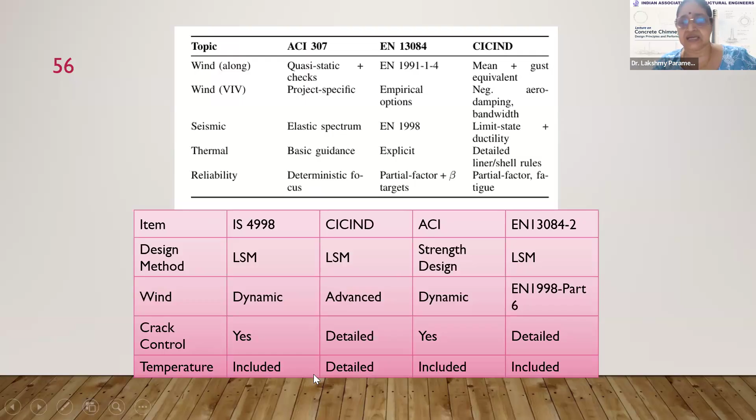Then fatigue is also considered in CICIND. You can see the design methods like limit state method, and dynamic analysis is required, and CICIND has some advanced procedures also given, and crack control is given, and temperature details are also included.

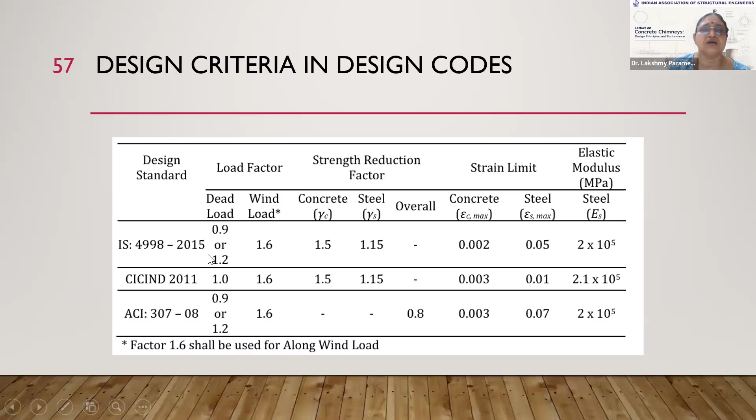And these are about the load factor. In fact, if you see our IS 4998, that is also very close to ACI 307, and for concrete and steel, here they have given a strain lower than what is given in CICIND and ACI.

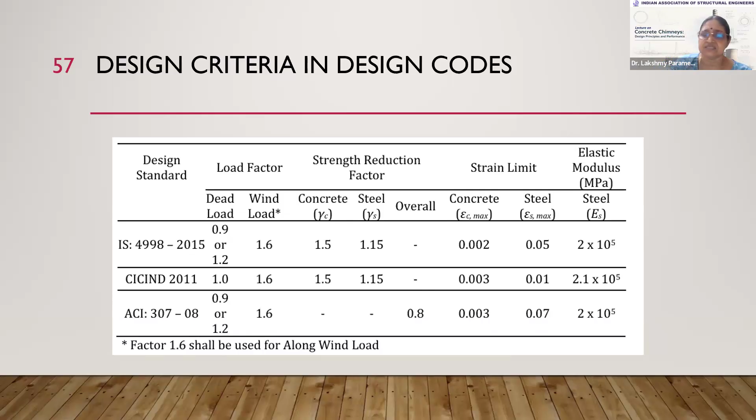So the factors are almost the same range. To conclude, basically the wind governs most of the tall chimney designs - along wind, crosswind, and wind-induced interference to be considered. Apart from that, the circumferential

wind effect is to be considered, that is very important because of the non-uniform pressure distribution around the circular chimney. Then dynamic analysis is essential because it's a wind sensitive structure, both for thermal, for earthquake as well as wind, because if it is a tall structure, you may have to go for response spectrum method, or time history method. So the dynamic analysis becomes essential, and also with respect to along wind and crosswind, also you need that. Then temperature effects have significant impact and need due consideration.

And we have seen cracks happening, and wider cracks, that should not happen. So IS 4998 basically aligns with the limit state design principles and is given in other codes of practice also. Serviceability and durability are also equally important as the strength check. But here, apart from the structural aspects, environmental regulatory compliance is also very essential.

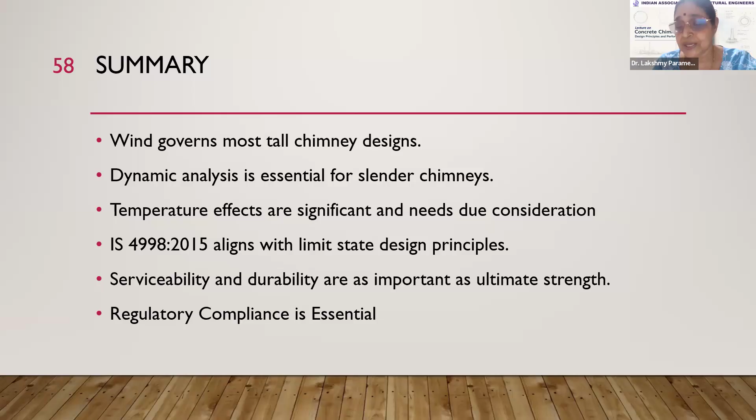So these are the aspects, and I hope I have given you an introduction to chimney design. But I'm sure that if you start doing the design, definitely it will help you. So thank you very much for your patient hearing.

And if you have any questions, I'll be happy to answer. Thank you, madam, for the excellent presentation.

I have just one or two things in mind. One is that for tall chimneys, this instrumentation during construction or post-construction - do you have something in mind for structural monitoring? I think I have not considered that aspect right now, but I think something is possible, I will look into it, sir. How it can be done, because of the thermal effect, the sensors etc. should withstand those things.

So maybe some non-contact measurement is possible. I'm sure there are certain aspects. Field monitoring is there for chimneys, but what type of sensors to be used - they are not the same ones which are used in other structures.

Second one is for tall chimneys, what about the enabling structures? Because that is also equally important - the type of scaffolding that we need to put. So that is what I said, there are two types of this thing. They have to be properly designed, the slip form or the jump form. So those things have to be properly designed, sir.